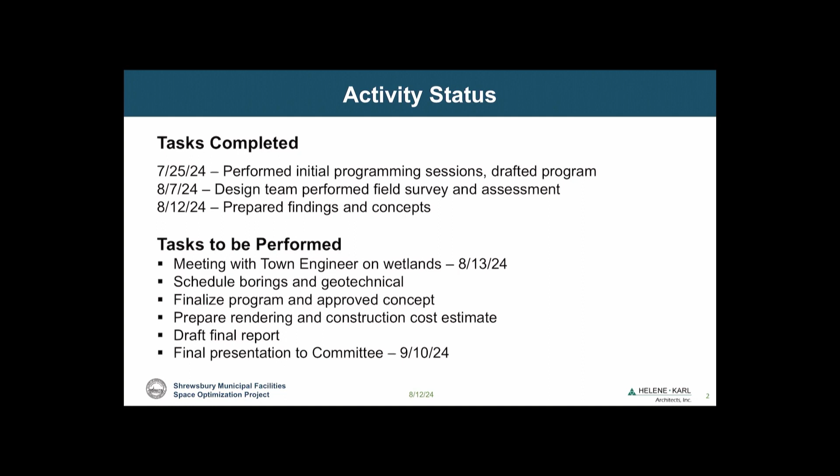So Highway's saying they're looking to hire like 3 more techs over the next 5 years or something. The garage said they would like to get a couple more. So what we've done is we've built this in.

Most of the hires they're talking about will have little or no impact on the actual physical space, because a tech or field personnel just need a place for their truck and they will move on.

I think in the office area, probably one of the biggest growths would be the solid waste and recycling program, because right now there's only one person working that. She would like to get some additional help. And if they go as far as they are talking about with the recycling program, there may be up to 4 people on that.

Oh yeah, so that's the more detailed program we have. I figured you didn't want to see 3 pages of spreadsheets with the itemized things. So yes, like for example the highway division includes the managers and superintendents, but then it includes all the drivers and the techs and everything in it. So we just lumped that together to get a personnel count overall for the building.

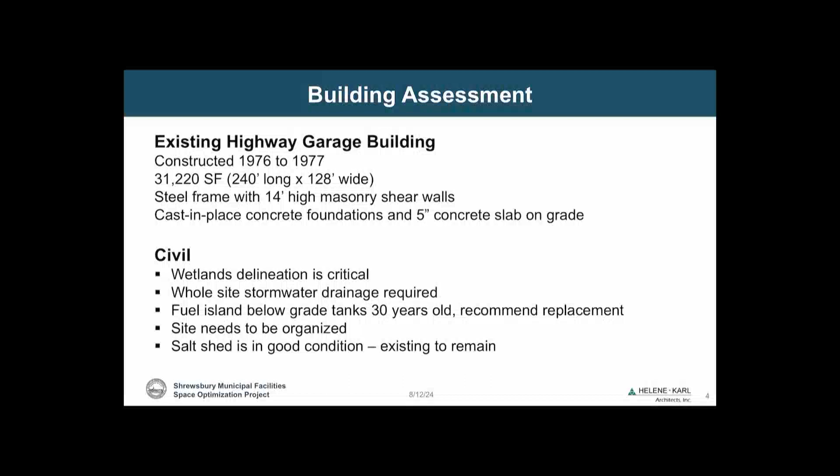Yes? Another question. Do you have the utilities, all the utilities and information for the civil and electrical, underground, any other items that are out in the yard?

Yes. So right now, we have a topographic survey that was provided to us by the town. We have not hired a surveyor to do that yet. This is something we can talk about. If we were to release the surveyor tomorrow, we're probably not going to see the survey for 6 to 8 weeks. So the question is right now we just want to get you to the point where if you can make a decision tonight - and I'm not sure that this will happen tonight, but let's just say it does - we can then make that determination whether we need additional surveys and stuff. At the end of the day, the answer is probably going to be yes, because I think the survey we have is probably about 10 years old, somewhere around there.

So I'm sure there's some things in there.

Regarding the utilities, Peter Glick, our civil engineer, is pretty confident that the utilities are fine because you have water and sewer out in the street, we have gas in the street, and we have plenty of power. So there's nothing out there that we're concerned about that cannot support the operations. If you were doing septic or a well, we'd be more concerned, but you don't have any of those problems. So all I can tell you is we have all the utilities on the site.

The question is are they in the optimum location? That would have to be determined, and then we will have to get more into the details about where the actual services are coming in, which would mean going through a more thorough topographic survey. My only concern is that we're going to build something over existing utility that we're going to have to deal with.

You will not be adding solar panels to that roof, or at least the existing component. The building will probably just squeak by, probably in that 5 to 10% range with the new metal insulated panels. It'll be a standing seam — they're great, very efficient, and they will provide additional insulation.

The perimeter masonry walls are in good shape, and they are masonry. They have the joint ties, but what they don't seem to have is any bond beams. Now again, as many holes as we're going to propose punching into this, we're saying it's not a big deal. We would skin it with metal panel anyways, which will bring up the thermal value. It addresses all sorts of things.

For example, on the existing envelope, you'll notice they have that 4-foot section of translucent panels — it's just a piece of plastic up there. It's deteriorating and there is no thermal insulation or value in there. So either we replace it all with glass, or we replace it with metal insulated panels and put the windows where they need to be.

And then, like I said, there's good news that there's no differential settlement that's been observed in this. So what I guess I'm saying is most architects would say let's rip down the building, because we all love to do new buildings.

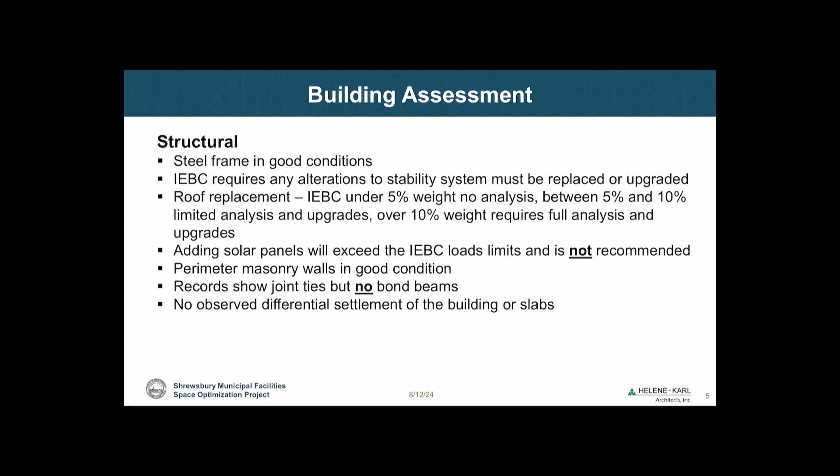But the reality is, in good faith, I can't tell you to rip that building down completely. I can tell you the structure's good, the slabs are good, and basically we can get by using that building. And when you see the two concepts that we've prepared, it makes sense to reuse that building.

Now, would I say rip all the masonry off and put metal panels on, get better insulation, put the windows where you need them, and get the doors? Absolutely, in a heartbeat I would do that. And that is one of the things that we would be proposing. But we can have a discussion on that as we move into that.

Next one, Mike, please. Okay, architectural. Well, the roof needs to be replaced because it leaks. The translucent panels, I told you, are deteriorated, provide no thermal value, nor does the walls. There's a 6-inch block with about an inch of rigid insulation in airspace, and then a 4-inch veneer outside.

Good news is I was advised that the industrial hygienist has gone in there. There is a mastic in there, which is typical for buildings like that, but it's not hot, which means there's no asbestos. So there's right now been no identification of any asbestos in that building. So congratulations, you're the first building we've done that's of that vintage that doesn't have any asbestos in, which is really great news. Because there's nothing worse than trying to get the mastic off, because you're literally paying to throw all the brick away and the masonry, because you can't scrape it off. And so you actually pay probably 5 times what you would pay for a regular abatement.

So the interior masonry is in good shape, so we will be reusing some of that and salvaging that. The restrooms are not handicapped, they're deteriorating and stuff. The offices are just all worn. It's a 50-year-old building. And the overhead doors are in fair condition. So probably didn't tell you anything you didn't already know about your building, except that maybe you didn't know that there is no asbestos in there, which is great.

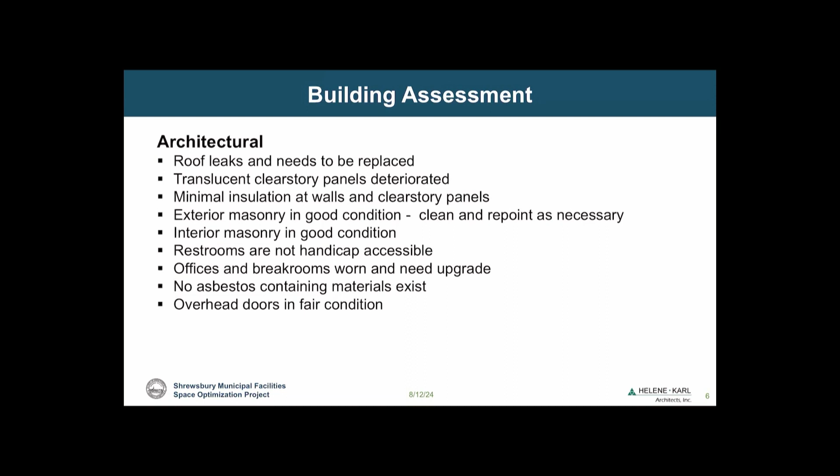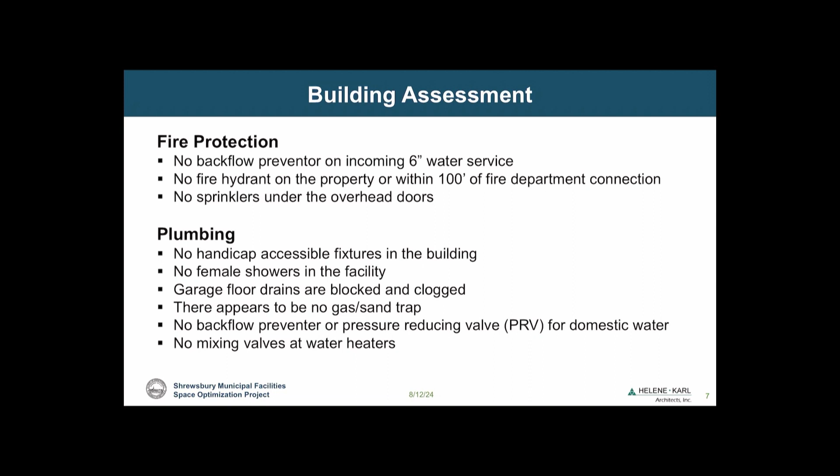No gas, oil, sand trap either.

HVAC: there is minimal ventilation in there, but it's not adequate. And in particular, there's no interlock with the CO detector. So you can have CO and the alarm can go off, but it doesn't tell you anything in the office, so you can be asphyxiated in the office. So that would have to be addressed. There's no NO—that's the nitrogen oxide sensors—in the garage either. You usually have CO, NO detectors in the garage because of the diesel trucks and stuff.

The offices have inadequate ventilation, and as do the repair bays. There's no exhaust system for vehicles and everything, and under the code, you're supposed to have 0.75 CFM per square foot movement of air out of there, which you don't have. Now, they'll say, well, we leave the doors open all the time, but that's not the way the code reads. You're supposed to have this.

Finally, when we get down to the electrical, it's probably the most outdated of all the systems, and it is inadequate. Again, I'll let you read it in the report because I'm not an electrical engineer, I just know enough to be dangerous—don't stick your finger in the plug. It's 400 amp service, 120/208 volt, 3-phase, 4 wires, without a main circuit breaker. There used to be, you could bring in 6 circuits into a panel without a switch gear or anything else. They brought in 7, which is a violation.

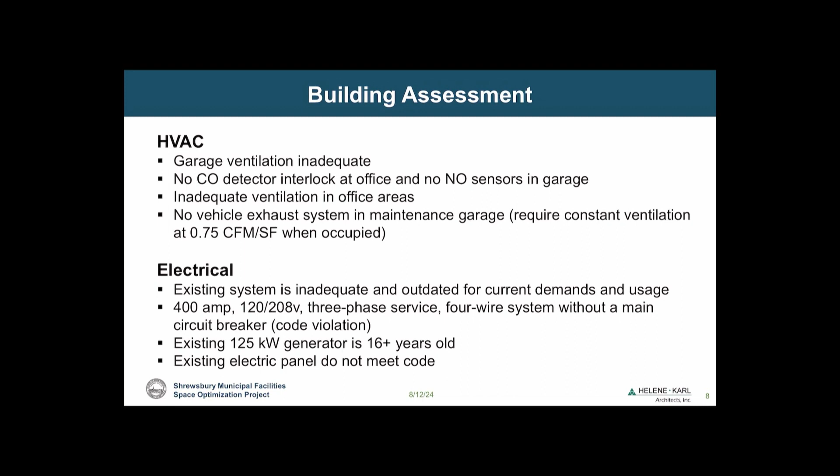So that's why when you brought up the utilities - you're upgrading your electrical, your plumbing, your HVAC - basically all we're saving is the shell of the building. But what I'm seeing in there, most of that seems original to the building. I know they've done some upgrades with limited lighting and stuff, but for the most part it's pretty original. So that's kind of the assessment.

Are there any questions on the assessment? This is probably a silly question, but why can't you just unclog the drains? There's a potential that you can unclog them, but the question is are they clogged because of dirt in them, or are they clogged because they're collapsed on the outside?

They're 50-year-old pipes, probably cast iron, and if it were a little older I'd bet they were clay pipes, which I guarantee would have collapsed. But it's 50-year-old cast iron pipe that's probably rotted - they've put salt and sand down there for the last 50 years. You may never be able to jet those out and clean them. But again, that's not our big problem.

I think this building overall - first time Mike will ever hear me say this - we're actually excited because at least it's a decent building. If we have to trench part of the slab to put in a new drain system to tie it outside the building, we're only talking maybe 30 feet of trenching to tie in a new system. And when you see what we're going to do to the building, I don't think that's going to be a heavy lift, because we're putting all the heavy lift into the new building.

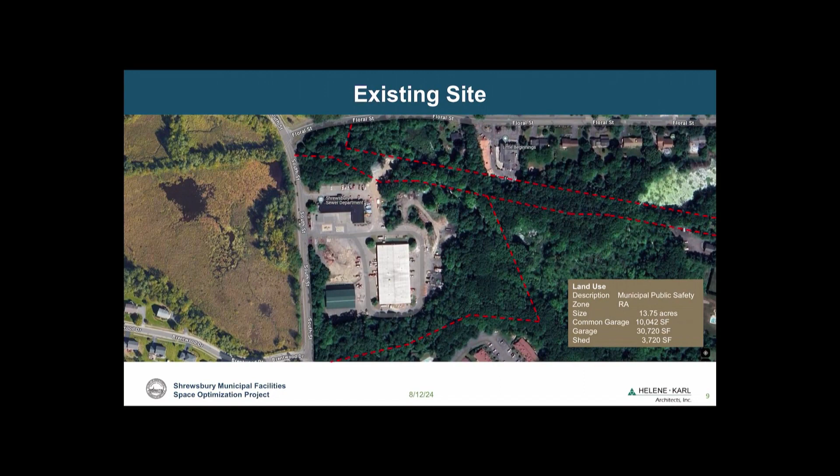Can we hold on a second and make sure that Patrick doesn't have any questions? Don't forget about him. Pat, do you have any questions? I'm actually fine, Beth, I don't have any questions. I am not surprised by anything that's been discovered in that building.

I had a dry well that was 30 years old, it got clogged, couldn't be unclogged, had to redig it and do it over again. To me that's just kind of a general maintenance type of thing, similar to these drains. All right, great, thanks. But we do have the drainage layout of where those pipes are.

On the existing building, the 74, 76 building - I have not seen those plans yet. I did ask, and Keith sent over some plans which were great, though the scans are not the best. The good news is the structural scans were really good, so it made it easy to work on. I have not seen the electrical or plumbing plans yet. I will follow up with Keith, but I asked him to send everything he had, and he sent about 10 plans, primarily architectural and structural.

Have you done an assessment on the existing water sewer building regarding asbestos and other hazards? I believe that came back clean too, didn't it? For the water sewer building, if we're going to take it down - yeah, minimally it has some tiles. No, he didn't see any tiling, he took lots of samples.

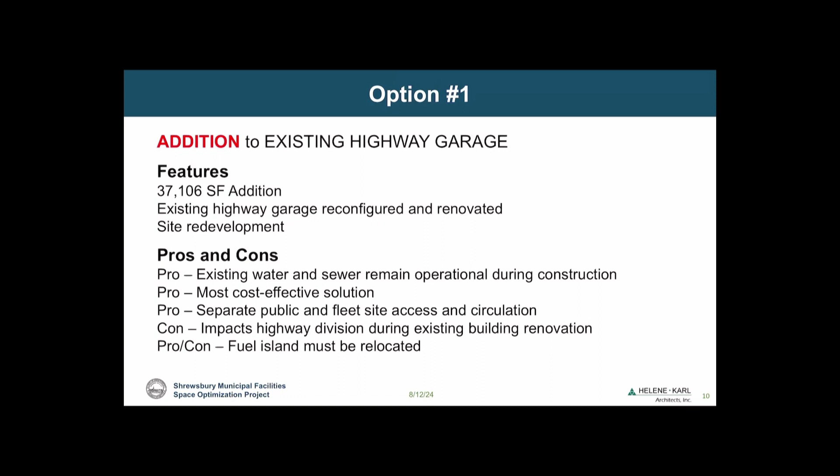Next slide, Mike, please. Okay, it kills me not to be able to stand up and point at everything. You're welcome to stand up and point. Well, I just don't know if everybody will see you. Well, I will do this. All right, well, let me start here.

Okay, so what we tried to do is color code it. Just stay near a mic, I think. Oh, okay, that way the people at home can still hear you. Yeah, okay, and hopefully Mark will turn that mic on for us so that it works.

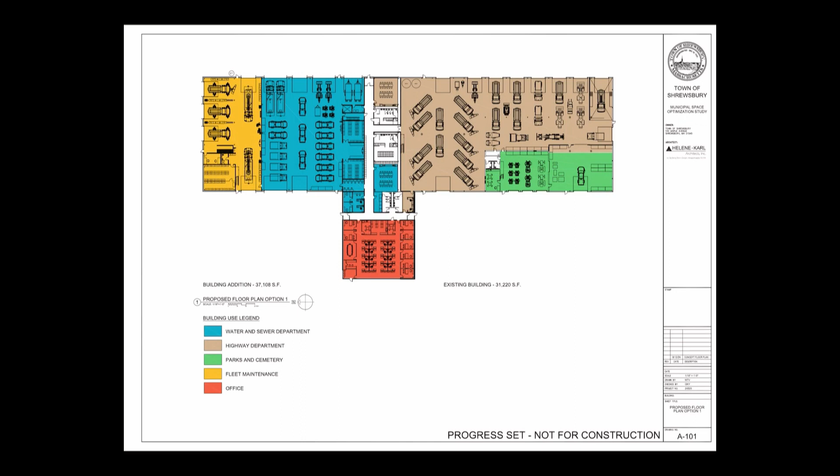So they can service any large vehicle like that, and that's currently how they're working most of the vehicles now. What we parked in here were vac trucks, so that they can service vac trucks and or ladder trucks or anything else. This can be a 3-bay if you put 3 smaller trucks in. As you can see, I can get 2 vac trucks in and still have accommodations to work. They will be looking for an overhead crane, a 2-ton, in order to lift plows and everything else. So on these single bays, they would just pull a little further in so they could get the crane to work. Otherwise, we're proposing that the crane runs up along this tandem bay.

The next item that you'll see is that kind of cyan blue, that is water and sewer. And what happens in water and sewer, this is the garage I'm talking about. You'll see that these pickups and trucks kind of look lost in there, like there's a lot of room. But what we figure is going to happen, we already stuff shelving there and everything, because ultimately that's what they're going to want to do.

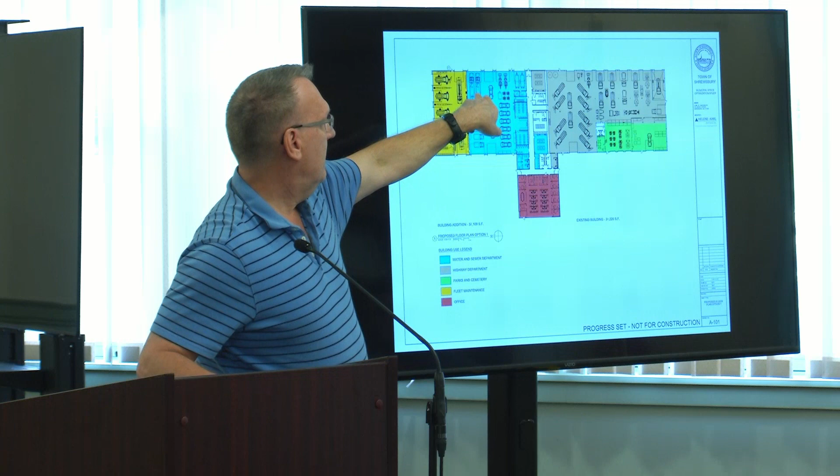But if you needed to, you could park 10-wheelers in here and they would operate. This is the same size as that, and you see how efficient they've managed to work that. You'll also notice that we put on this bay, we always put it at the end condition, for the vac trucks, because they're just too monstrous to turn inside the building. So we just let them pull out and do all their turning outside, and they can just park in there. Then these are the workshops and storage rooms and stuff that they have, as well as some trailers that they need to store.

And this is where, and again we'll have a clean white sheet showing this. But right here is what we call kind of the crew place, where they have just a table or something that they come in, fill out their paperwork, and they're out.

They spend probably 15 minutes in the morning, 15 minutes in the afternoon. This is where they could also do two stations for training, since they have online training.

When I was talking about the office manager, we're putting the office manager, the assistant, and dispatch right here, where there would be a window so they could see their area.

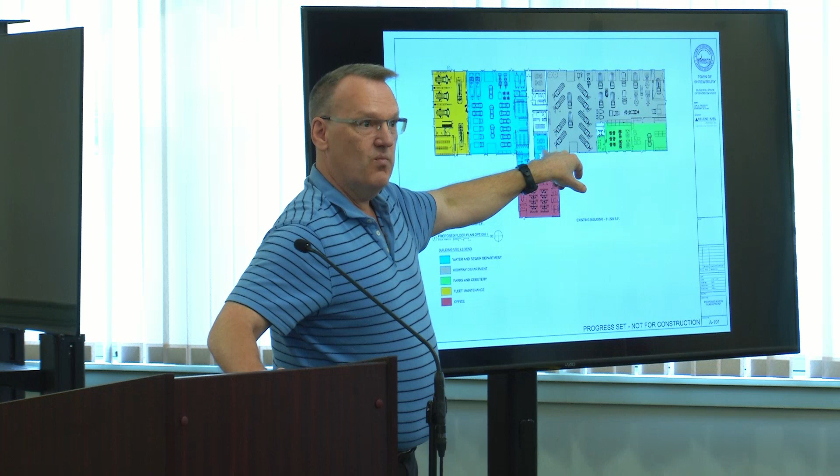So they're still part of the bigger office area, but we've pulled them out because they prefer it that way. The same thing happens with highway over here. This is the new highway office, for the supervisor as well as the office manager. They're right next to their highway area, but still part of the overall larger area if they need it. These are break rooms for water sewer and for highway.

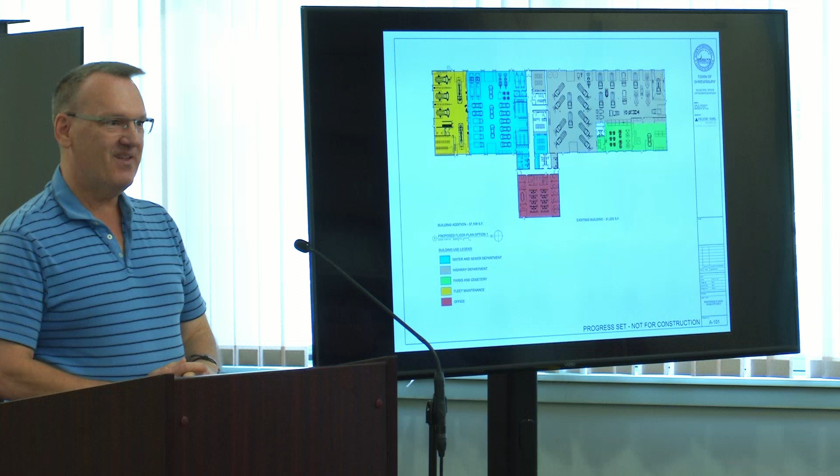We asked the question, could we put everybody together? They all get along, nobody had anything bad to say about the other, but they also kind of like their two separate little worlds.

The only place we said you're just gonna have to get along is the locker rooms, because you'll see on the other scheme we have to build two locker rooms due to the way the buildings work out. So we've given a decent-sized women's room, about 10 lockers, and we put 40-45 lockers for the men in this area.

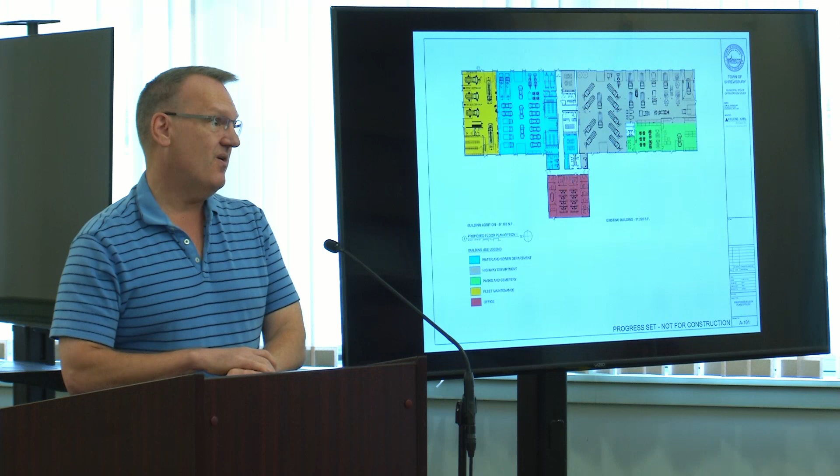Did I hear we do have one woman on staff? There is currently one woman working the highway, yeah. We do a lot for Eversource, and 10 years ago there was very few, maybe one woman lineman or underground. Now they fill up their locker room with like 100 women, so it's a changing thing. We've adjusted for that here. It's still predominantly male, but if everybody shares the same shower rooms and locker rooms with new facilities, I don't even know how many people shower at the end of the day. Right now it looks like nobody, because there's no showers in there worth talking about.

The other thing is, along the service corridor where everybody crosses through, we have what we call platform lockers. They're about 2 feet wide, 2 feet deep by 4 feet, and they stack on each other. That's really good for crews with boots, rain gear, hard hats, and other miscellaneous gear, so they leave their other locker for clothing when they shower.

Highway stays pretty much like it is. There's their main garage. What we've done now is rip out this area back here, which is currently the break room and everything else, and punched in additional doors. So basically we've doubled the size of highway's area for vehicles and stuff.

They seem to need that. Do they need double the size? Probably not, but it didn't make sense to do anything else with it other than make this entire area highway.

Over here is the wash bay that all the departments share. In this case, we would cut out a new line through the slab, put the drain in, pitch the slope so we can take that to the sand trap, oil water separator, and take care of that. This would probably take a bit of work, but there's not a big lift to do that.

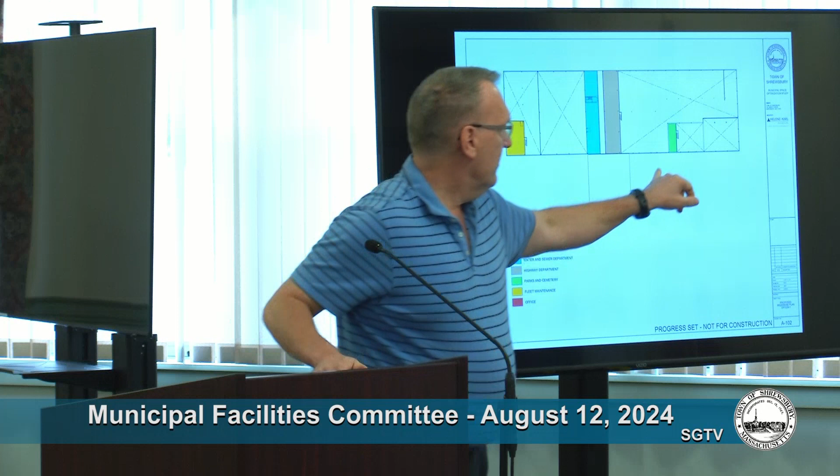Sure. So you'll notice there's a little green mezzanine area here. That's an existing mezzanine, where the vehicle repair garage is right now, and they use that. So we would give that to Parks, and that's Parks' area.

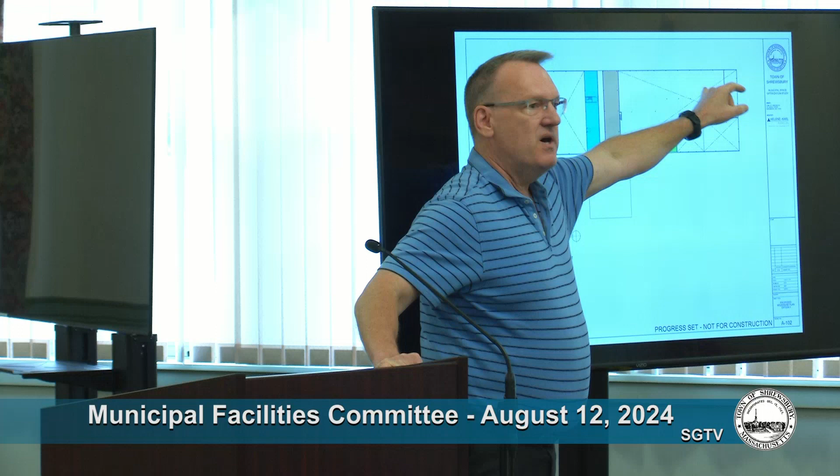Now, if you remember when I was talking about the masonry walls or shear walls - I punched in all the holes back there to allow the trucks to move in and out more freely, which gives you maximum flexibility.

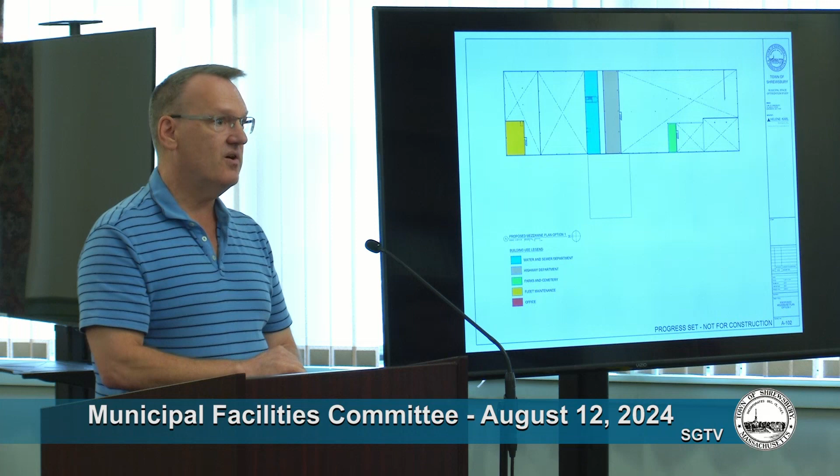Because those are shear walls, they will have to be rebraced, whether it's diagonal bracing or whatever we put in there. Again, not a big deal - the building is in good shape, and the engineers are confident with it. It's just something we're going to have to consider if we decide to move on a plan similar to this. All right, next slide, Mike.

All right, this is what I guess we're most excited about, and it's probably hard for you guys to see, but you'll notice that office piece wedges in just like that. It's about 20 feet off of the existing water sewer building. The reason we did that is so they can dig, put the foundations in, do everything they need to do, come over here - you see we overlap the existing highway building by about 15 feet. So this is the new office addition, this is where we extend the existing building on.

Again, is it an ideal working environment? You know, these guys are gonna say, oh, we miss our back route and stuff - sure, but you can still work and everything on that.

Is the mic not working? It's fine. Oh, okay.

So, but what it also does, we feel, is clean up the entire site from an organizational point of view.

What we would propose is a new curb cut here. Relocate the fuel island next to the salt storage island, where this is where all the fleet comes in. The fleet has some parking here, they can bring the trucks in, drive around, do whatever they want, and you can put a gate there like you currently have. And then we'd also put a gate here for there.

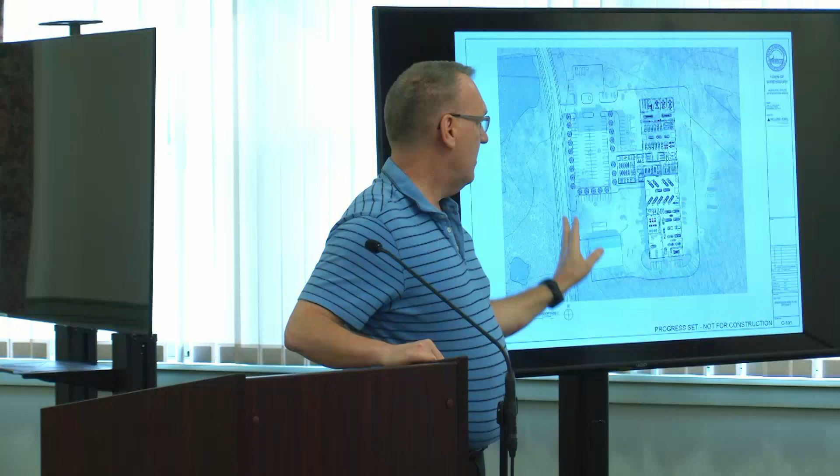So basically, I can lock off three-quarters of the site from public access, all day and all night, weekends and everything. Whether water sewer comes out and drives around like this to leave the fleet exit, or whether you want them to use this entrance, that's a decision for management that we'll review with the various user groups. But if you do put a gate right here, which we're suggesting, during weekends or whatever operational hours, they can come in here - there's a little guardhouse or attendant's house, which was requested and needed, for the recycling.

There's some trailers for like the mattresses and stuff, you can put some dumpsters, and this kind of circular thing is for the composting pile. So people can come in here, drop their stuff off, and leave like that. They can't go past the gate, so they're completely segregated.

If it's an incredibly busy Saturday, and 300 people have nothing better to do than go to the recycling all at 10 o'clock, what we're proposing is they come in, they queue up through the parking lot like this, and then circulate out. So you won't have any queuing problems on South Street either.

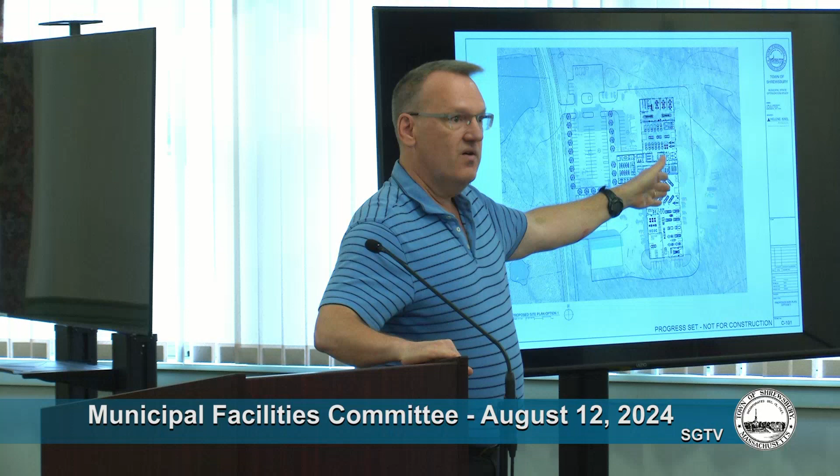So basically we're saying this is the public realm. Employees and the public would park in here. If I was visiting, needed to talk to water and sewer or something, I'd come into the front entrance here, request them.

But as you can see, we've basically isolated the fleet operations and everything, all the critical operations in the back. And obviously what we would do is develop this back area here too for your spoils and material bins and everything else.

Additional trailers and everything could fit in there. You'll notice we have some parking along here. If you chose to, whether it's this initial cost or at a future date, you could actually put canopies up there as well, to provide additional coverage for these vehicles should you get more and more vehicles.

And we did punch in a little door here as well, just so whether Parks uses it or something, so that you have full access to this. So overall, we think the building worked out great. The building is where it should be, smack dab in the middle of the site, and we believe the site plan as shown gives you an opportunity to segregate the areas from fleet and from the public, and it all works very well, very efficient.

Next slide, Mike. Okay, so this is just an enlarged plan of what we've been talking about. I know it's probably incredibly difficult for you all to see it. I'll be happy to address any particular issues you may have on the plan.

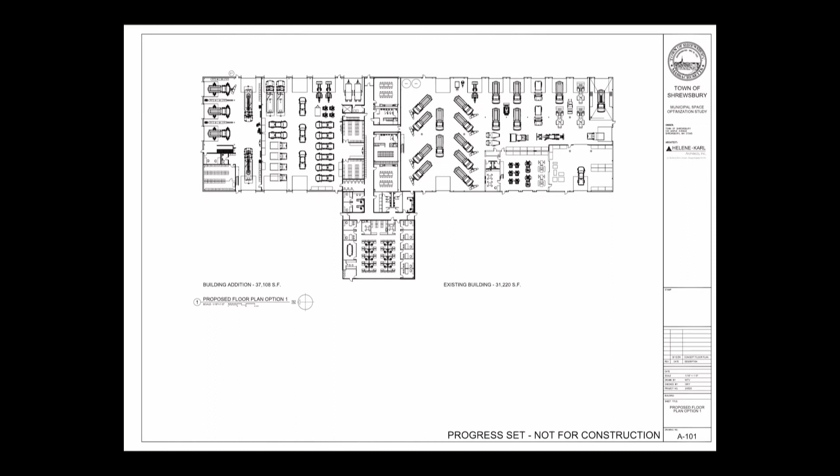But again, garage, mechanics office, water sewer, vehicle storage. This is their parts room, one for water, one for sewer. They're willing to do a common workshop, shared area. We left this open in case they have to bring in a pipe with a hydrant or something on it, so they can work that way.

They have what we call a decontamination room. It's not really that, but they said sometimes they come in covered with sewage or something, so that gives them a place to wash down. There's a little washer and dryer here that everybody can use, the entire fleet.

They have some specialized trailers that they need to park inside, so that's why we did that. This is where the crews would come in the morning. I can actually stand at the dispatch window, a sliding window or not, however they want to work it out, and say here's your order, here's what you're doing today.

They can fill out their information. We would plug in a couple of those terminals so that they could do training, because they do computer training there too. And then there's their offices, so they're all together.

We did have to give them a little bit of space, and this is something we have to work through with engineering as well as water and sewer. They do have some flat files, so this is kind of the flat file room with a surface they can lay stuff out. Right now it's just kind of in the middle of nowhere land that they use.

This is their break room, shared locker room for the men's, women's locker room. This is highways' break room, highways' vehicles and stuff.

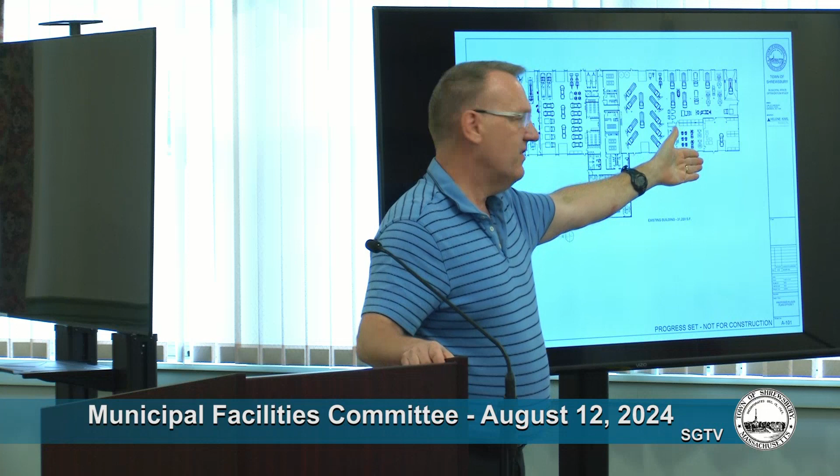And then Parks has their little area here. This would be the highway manager and his supervisor. And I've met both of them.

This would be the restrooms for the office area. Now, of course, anybody could use them if they want, but I'm assuming the crews are going to use the crews, and that's kind of a maintenance thing. But then this is where either the public could use it if someone's visiting, or this is where the office staff works.

Offices for the various departments on either side, main meeting room, reception area here. And the way I've seen it working upstairs is they seem to all share the reception responsibilities, and so I will call Justin or whoever I need to do if that's their business. So there's 2 seats there.

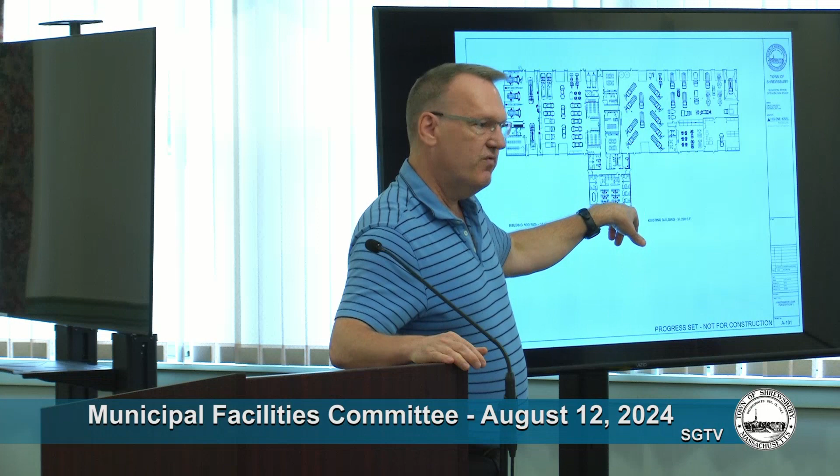You could even get 3 seats in there if you needed to. Still visible from the cubicles and everything. And again, we can shuffle some of these pieces around.

So let's go to the next slide. And that's just the mezzanine, and I think we've already talked about that one.

All right, so let's go to option 2. Option 2 is basically a standalone building. You'll see that we keep the existing highway garage up there, and what we're proposing is Parks and Highways would stay in the existing building, and it would get fully renovated, and then all the other functions would move over into the new building.

So the pro is, you'll see it's very similar to this one. We segregate the public from the fleet vehicles. I think this has a lot more cons than it does pluses.

The existing water and sewer will have to relocate during the construction, which could be a challenge because they have a lot of stuff and a big fleet. And unless you have like a car dealership or something vacant in town, there's not a whole lot of places they can move.

That's why we would think if you do go with this option, we would tell them to move into the Parks and Cemeteries area and then move Parks and Cemeteries somewhere else, because it would be easier to find small trailers or a garage or something so they can park their mowers, as opposed to the bigger operations. It's more expensive. Why?

Now again, we can talk about it. Both schemes impact the highway and parks. The question is, do we build the new building first and then let highway share with water and sewer until their building is renovated? We think that if you go with the first scheme, you could actually get everything done a little more systematically.

Because what I mean by that is, we're estimating it's going to take about 2 weeks to replace that roof with metal panels. Is it ideal that highway's in there during that work? No, but it's not dangerous work. We just tell people, if you have a really critical piece, because you're only picking up foam panels with metal skins, so it's not like you're going to be having a lot of hassle.

Plus, they're out most of the day, so you could just tell the contractor, you don't start the roof until 8 o'clock, and you have to be done by 2 o'clock so that the fleet can come back in. And I know they do come back for lunch, but again, arrangements can be made.

So we do think that you could actually do the first one a little easier with contiguous construction as opposed to breaking it up. And then, in this case, the fuel island will have to be relocated.

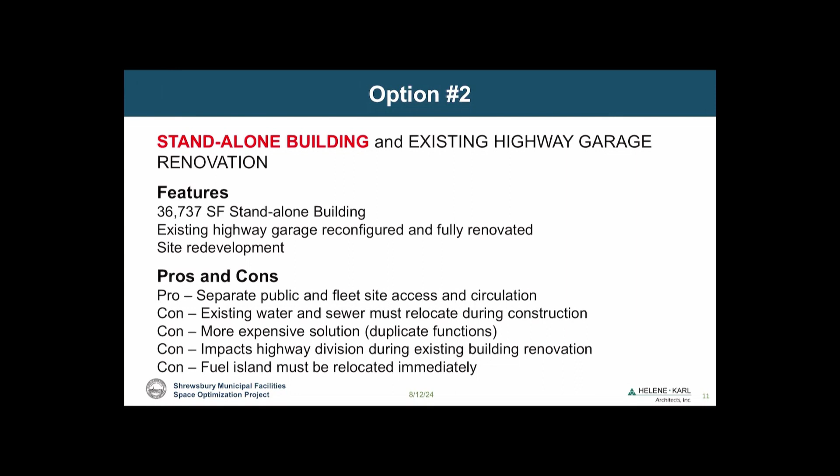So Mike, if you go. You will see that this is a very similar plan. Highway's doing their thing, Parks is doing theirs here, they get a slightly reduced area, because this white core now is where we have the break rooms and the bathrooms and all of that for them.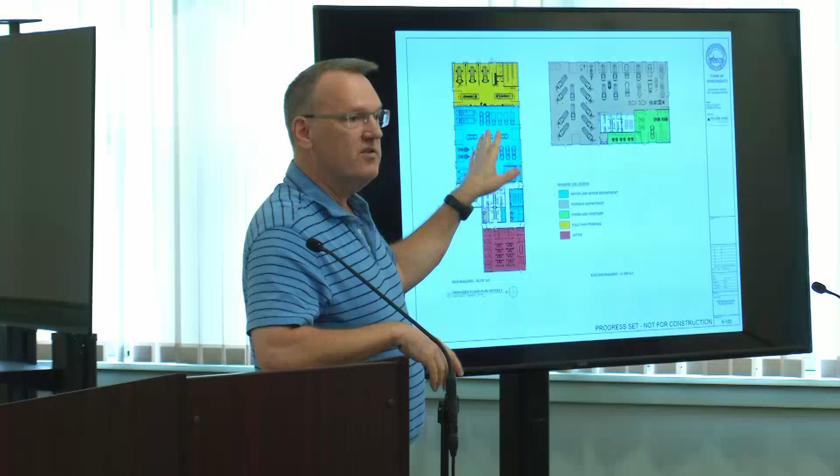You'll see this building looks very similar. The big thing we did is we tacked the wash bay on here. Not in love with the location of the wash bay, but it was the place that we could put it. The office and everything pretty much stays the same, and the program for all essential purposes is pretty much the same. I'll be happy to bore you with more details, but I think you've heard everything I can say about the plan. Next one, Mike.

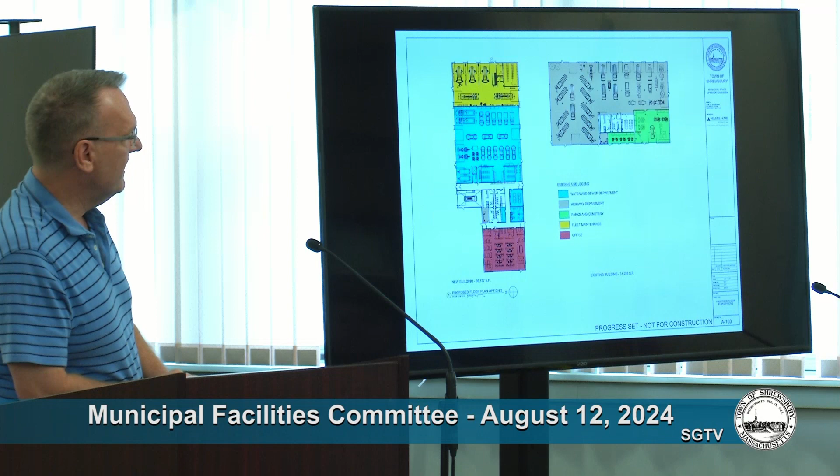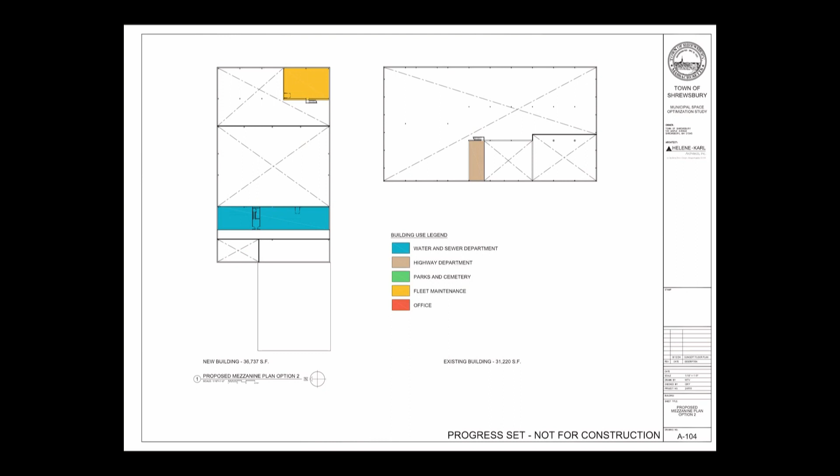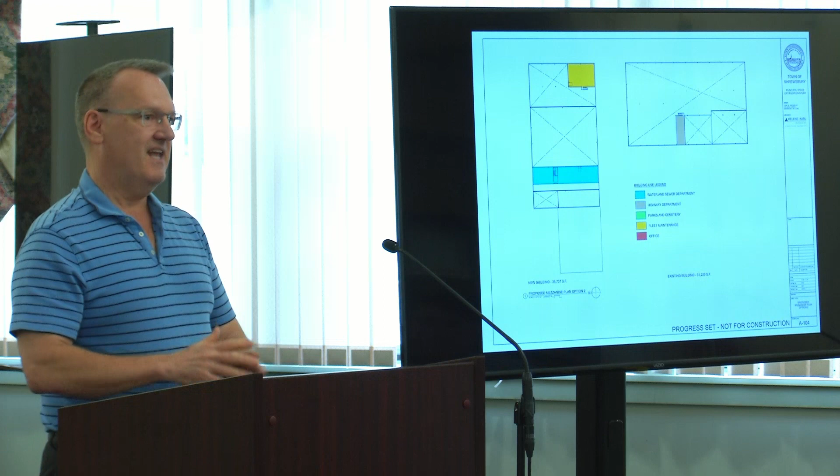There's less mezzanine for highway here, because you're only going to get it for water and sewer—they have the little small mezzanine. One thing I've noticed with highway is everybody wants storage, whether it's for signs, cones, or everything in between. Granted, they probably store stuff they shouldn't, some of it 300 years old that's never been used, but nobody wants to clean it out. I get it, but once you do the new building, a lot of this stuff will go away.

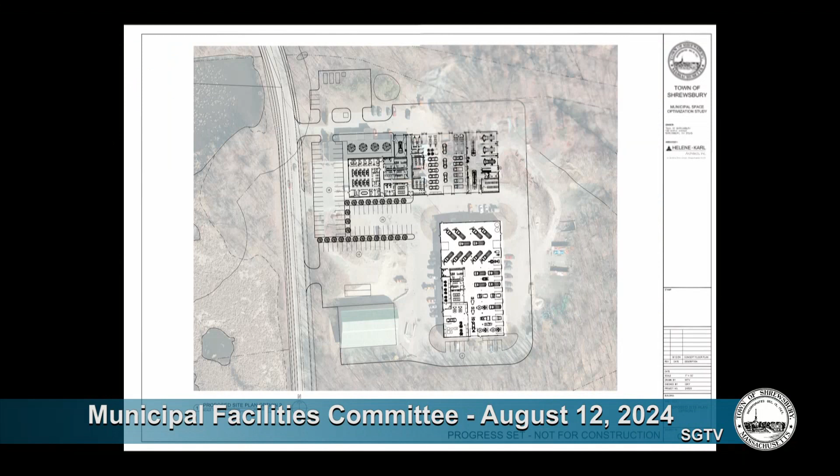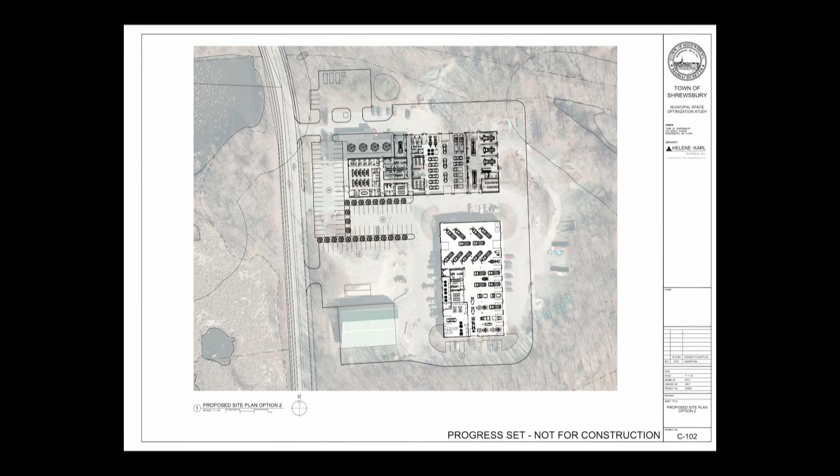This is what happens to the site. We've tried to keep the segregation of the public from the fleet operations. We've compressed the parking quite a bit, so now we're jockeying parking around. We've wiped out the water sewer building, which creates the biggest headache, and you're really not getting anything out of having a standalone building. We looked at doing a brand-new building, taking out highway and everything, to see if we could make it more efficient. We're not saving much—maybe 1,000 to 2,000 square feet on a good day—but that means paying to replicate all of this when it already exists. So why spend a dollar to replicate this when you could spend 30 cents on the dollar?

This is where the building wants to be—smack dab in the middle of the site. The fact that the building's there is 50% of the battle, because putting it here doesn't make sense, you'd have a no man's zone in the back, and putting it back here doesn't make sense either, you'd have a no man's zone in the front. The building wants to be where it is, which is why they originally put it there. I don't know the origins of the compost pile, but that's easy stuff to take care of. The salt shed isn't moving.

So we said, let's use the assets you have, and our strongest feeling is to put the addition on the building. That's the whole presentation right now. We'll be happy to address any questions you may have.

What's that dashed line around the parking? These are parking spaces, and these are trees. Oh okay, it's kind of hard to see, but it looks like the parking is cut in half there. It is—there's some in the front though. You have the public parking here, and separate employee fleet parking here. So now the employees either have to come through here and park, or come through the fleet entrance.

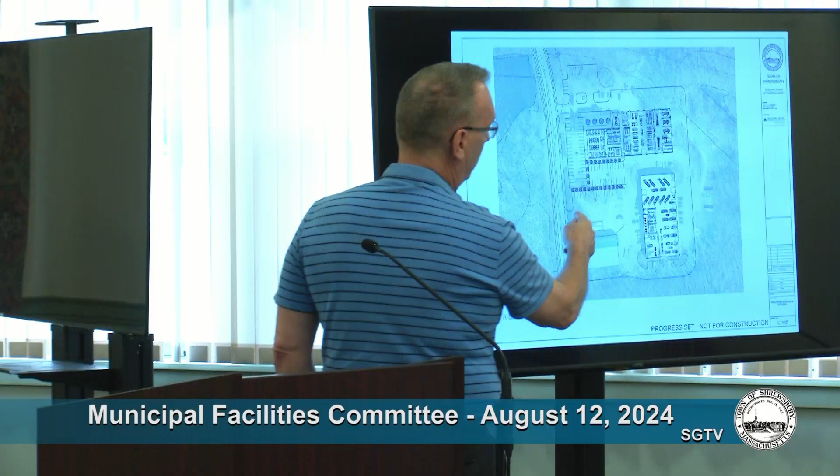Can you lock everything off with that? You can lock this off, and if I have my SUV I guess I could pop the curb and get in there, but yes, you can put a gate there as well. It's not optimal in our mind. Mike, if you can go back to the other plan.

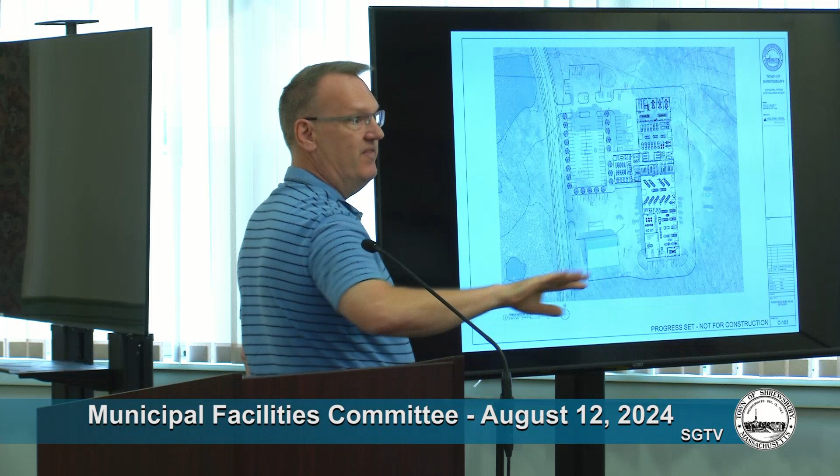This gives you the optimum plan, because as you can see, we get all the employee parking there, with some additional parking here and some down here and down there. You can share that—supervisors, managers, fleet vehicles, whatever you want there. But you clearly have this corner as the public zone, and everything else is operations. We looked at probably five different schemes for how to put this building, and we could bring you five different schemes, but they'll all be iterations on this. It just made sense to do the addition, which you probably don't typically hear from an architect—put an addition on.

I've got a couple of questions. Certainly, ask as many as you want. In your square footage numbers, I don't see any utility space. You talk about a whole new electrical system, but I don't see an electrical substation or any other utility spaces that are going to be needed within the building.

Yeah, so we would always put the utility rooms on the mezzanine. You can put them up on the mezzanine—we put the electric room on the mezzanine, we'll put the boiler on the mezzanine and everything.

You're gonna have switch gears, a BDA closet, all of that. Mezzanines are great locations because they're not frequently used, though they still need to be accessible. We have so much mezzanine space, I can carve out maybe 1,000 square feet total. So we just carve out a chunk of the mezzanine and put it up there. The other nice thing about it is it's just out of the way.

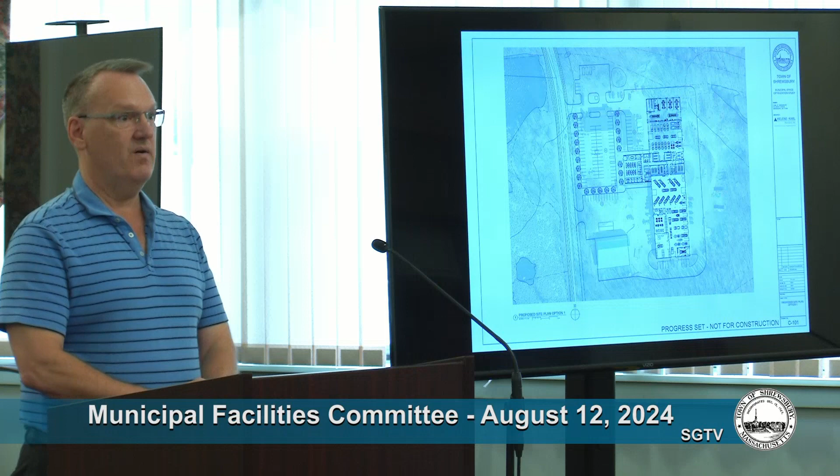Are our people okay with that, accessibility-wise? We haven't had that discussion with them, but I don't know why they wouldn't be okay with it. Just because we do it on all the other garages doesn't mean that's the way you want your garage. But one thing we find is, why would anybody be in the electric room? There's gonna be panels and electric closets on the first floor so they can shut stuff off.

As far as the main utility services coming in, why do they need to be there? The hot water boiler - why do you need that nearby, we can just get that up and out of the way. The BDA closet is just sitting there as an insurance policy - that's the bidirectional amplifier - it just sits up there waiting for a fire, which hopefully you'll never see.

The only problem I see is that the electrical comes right in that corner where the addition is. So you'll have to figure out how to keep operations going while building the addition, then get the mezzanine, and then tie the electrical back in. That's like a constructability issue we're gonna have.

So here's what I'd say on that - we're not there yet, but these are things we need to consider. That affects, well, maybe with option two we don't have that issue, but I didn't see that in your pros and cons. I hear what you're saying. I'm not overly concerned about it yet until I sit down with my electrical engineer.

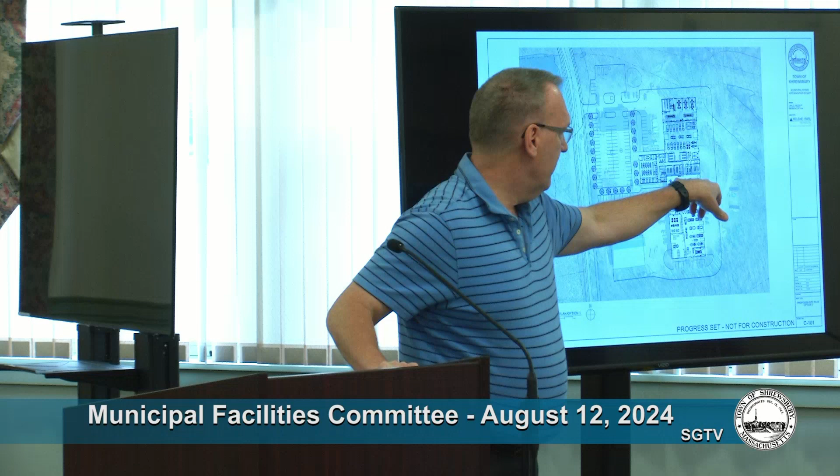There may be a temporary connection - there could be a lot of things that could happen there, which you don't see on these plans very well. Can you see that strip right there? That's what we call the no man's zone, because we cannot build right next to the existing addition. We're going to be off like 5 feet to get the columns and everything else in - there's going to be a no man's zone there too.

Those are one of those areas that may become the temporary utilities or something. The reason you do that is because you don't want the buildings moving. The existing building is stable, the new building will probably settle - and when I say settle, we're talking like a quarter inch to half an inch over time - and there's going to have to be a joint there anyway.

But we have electrical problems anyway on this building. Oh yeah, and so that may be the first bullet we bite and just have to say, hey, this is what's happening with the new electrical.

I think you're gonna have the same problem with the ventilation system, because on the north side of that existing garage, all those vents are blowing right out into the new building. So you'll have to renovate the existing building before you start the other building. Potentially - again, this is a constructability issue we're gonna have to address.

Right now, which is really nice - have you seen the ductwork in there? It's spectacular - it's the flex ducts, as we call it. I wish all our buildings could use that duct, the fabric ducts, because they blow up when you need the space and collapse when you don't. Those are things we'll definitely have to consider. The fact that you don't have a lot of ventilation in there right now isn't necessarily the biggest crisis, and we will work around that - but those are all very fair and valid comments we'll have to address.

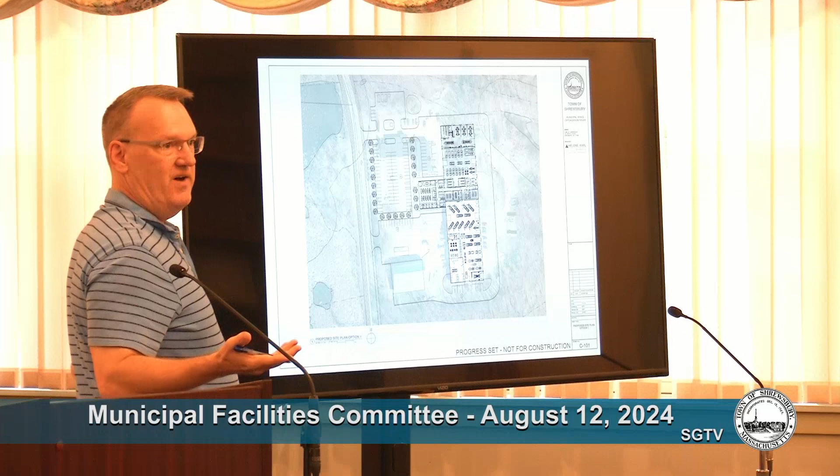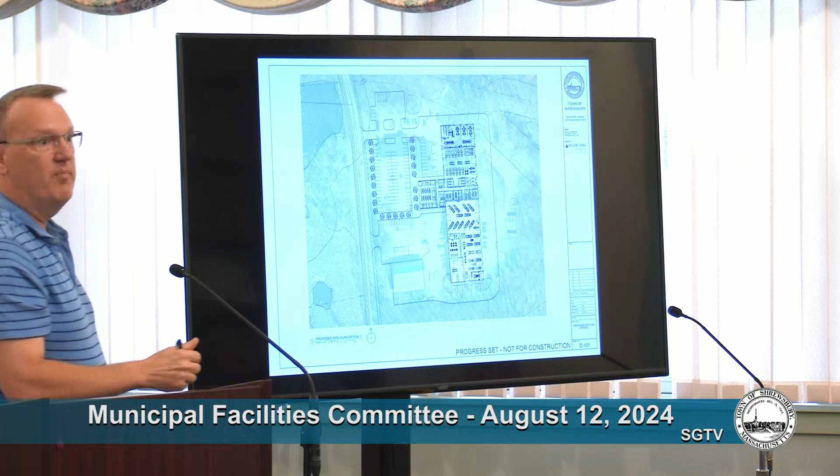What we also like about this is, I don't know if fire and police departments use the fueling too - I know a lot of towns have everybody use it. But one thing they all like is they want fire or police to come in, drive around, fuel up, and drive out. They don't want them driving around the whole site. That's why we'd propose putting that up front. You guys can decide whether to use key fobs or however, we'll work through that, but the idea is anybody from the town could use it.

Patrick, do you have any more questions? I do not, thank you. Just one more.

Of the 77 employees, is that taking into consideration what might be moving from town hall? Yes, that's including the town hall. We're taking everybody from upstairs, and of that 77, there's probably about 10 or 12 that are future hires. They're primarily technicians - either a mechanic working in the bay, or working at water and sewer, basically taking a truck out every day.

I just want to be clear there's not plans to increase staff with this design, right? This is planning for the future growth of these departments, but right now there's no intention to add staff with the opening of the building. One of the questions the public will ask is, what are the increased operating costs if you're adding additional staff - you think about 12 staff. But this is something we're planning for the future, not saying when the building opens we're also going to have the additional operating cost of 12 more staff members.

That's accurate. No, no. All we've done, other than the offices, is probably like 2 or 3 extra cubicles and 2 extra offices. That's about all the physical impact of the anticipated future growth is. The mechanics working in the garage aren't going to get any extra space - they get the locker room just like everybody else, so there's no increase. It's very clear there will be no additional staff as a result of this building. We're just trying to plan for the next 10 to 20 years, with the 50-year building life longevity.

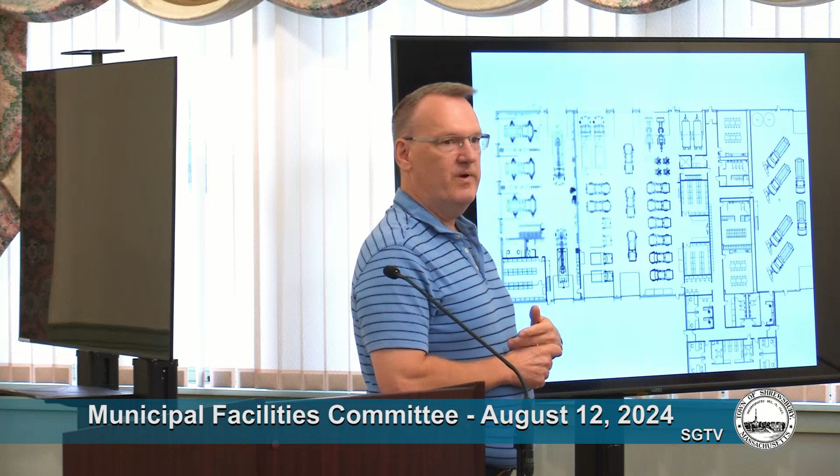Okay, so one of the things we find with highway garages as well as parks and cemetery and all that, you guys like big storage, okay, and everything comes in on a pallet. We saw the pallets of fertilizers, we saw the pallet of stone. So what you'll see is here's water and sewer. Primarily what they need is secure storage, and I use that term loosely, because they have smaller component stuff, meters and things like that, so they're gonna get basically standard racks. We can put in some 4-foot deep racks on pallets and stuff, but they didn't seem to have a lot of palletized stuff, they had more kind of small stuff.

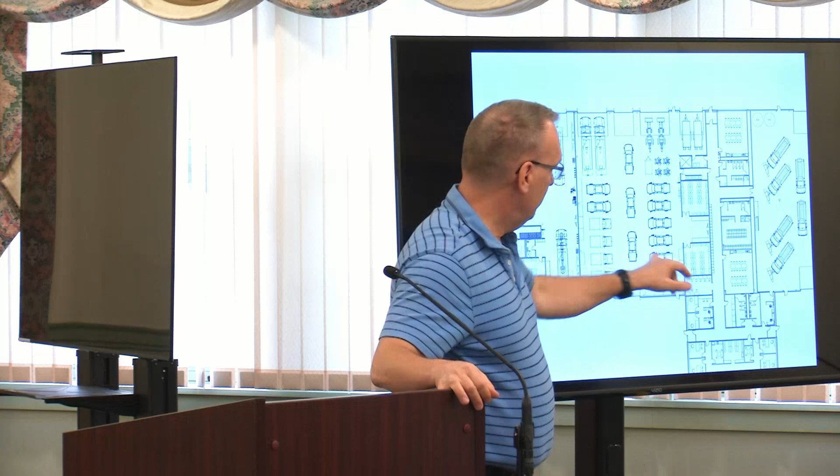You'll notice that we have racking all along this wall that we can put as well, for their more palletized things, because they do have some of the heavier valves and stuff. They could put it along this wall if they chose to, but there's not a whole lot because of that. Or they can just line this entire wall, there's no reason why they couldn't go 3 high. There was a discussion that they are going to get a forklift as well to run operations, which I think could be shared by all the organizations.

So that is how they would take care of their things, and then they have the mezzanine. So there'd be a forklift ability to lift to the mezzanine, however they want to put it on pallets or racking there. Same thing with highway, they would get a mezzanine stuff. Highway doesn't seem to have a lot of storage needs, they have fluids and stuff, but other than that they didn't seem to have a lot of storage. If we go on down now, Mike, to Parks. Okay.

Parks has all this racking in here. They can park vehicles, they can configure however they want to do. But what we figured is that they would at least have this wall with pallets 3 high, and where this jogs here, they have this pallet here, and they can also do pallets here. So they could be a Home Depot based on what I see, if you get the proper racking and everything, because they're very seasonal.

I think this week was fertilizer, or the throes of fertilizer or something like that. One of the other things they talked about on storage is the salt and gravel and stuff. I guess each department pays for their own gravel and their own sand and stuff.

Maybe that could change a little where it's a town operation where they could share, because highway uses their gravel when they need it, water and sewer uses their gravel and sand. And I know that they lend each other a ton or two now and then, but for some reason they made an important thing to say, we distinguish.

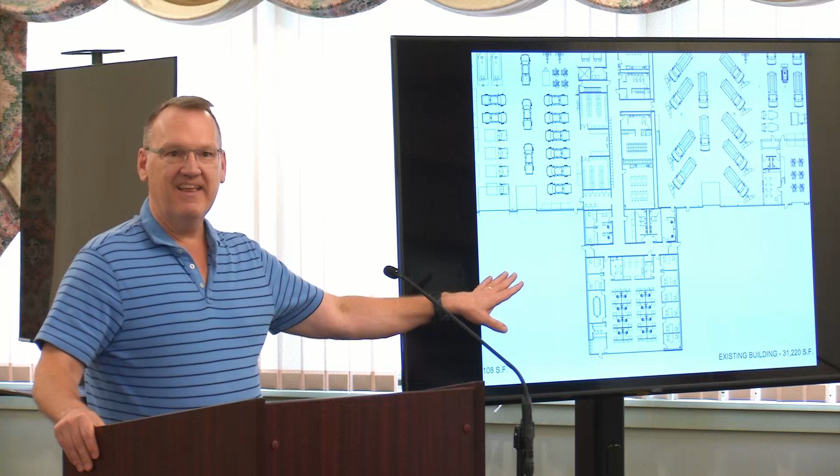So, not a knock against Eversource, they're a great client of ours, we've been working with them for 30 years, so I have no complaint. But I'm saying your guy, the crews, the groups that we talked to were very reasonable in their request and seemed very accommodating.

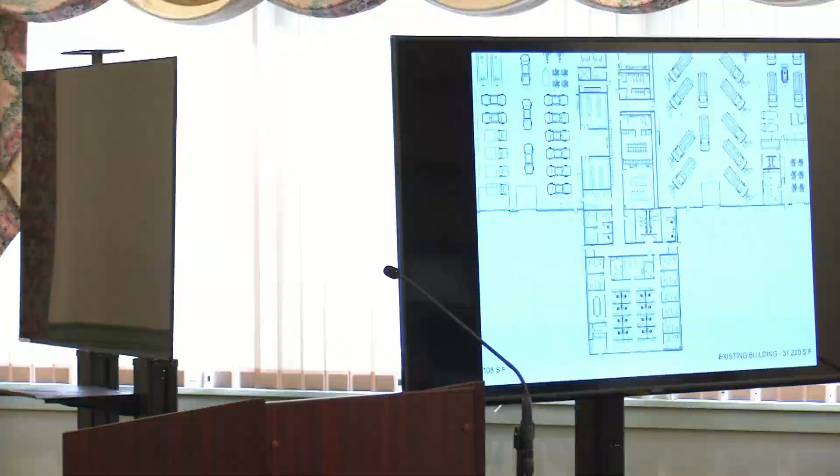Answer all your questions on storage? Yeah, I was just thinking about the opportunity to make efficient use of the volume of the space in addition to just looking at the area of it in plan.

Does the fact that option 1 is a single building as opposed to standalone options confer an efficiency in enabling departments to share use of the forklift, for instance, as opposed to shuttling it between buildings? That is very doable within the same building, but I've seen people shuttle forklifts between two buildings all the time, because it's ridiculous to buy two forklifts that are only used once or twice a week.

So the biggest thing is really just a matter of sharing those common core things, like you only need one locker room. But yes, we've tried to move as much mezzanine out there as we can. And if we can get the garage to fit in there without having to bump up that roof, that's the other thing we'll do, but that's the questionable one.

When you lift one of those full trucks up, typically we like to have 24-foot clearance, because by the time you account for the ducts and everything else, plus the fact that they have a bridge crane there they want to keep, for picking up plows and such, we told them we wouldn't go over a 2-ton bridge crane. They currently have a 1-ton. And one of the garages, what was it, 10-ton? Because they insisted on lifting a truck fully loaded with sand.